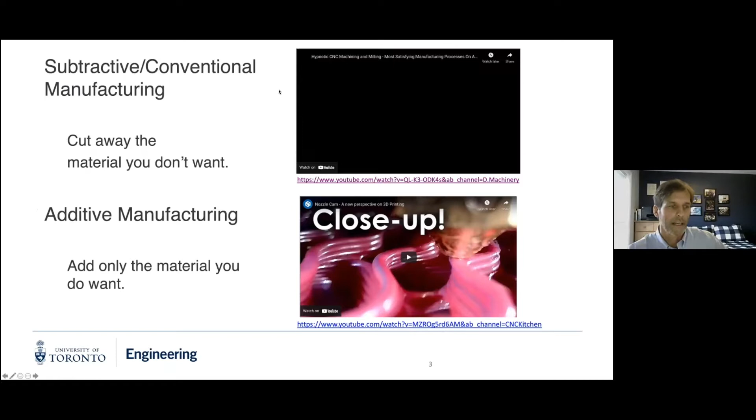I'll start in a very basic way talking about the difference between conventional, or subtractive, manufacturing and additive manufacturing, which is the other word for 3D printing. I'm just going to flip back and forth to a couple of videos here, so bear with me for a moment.

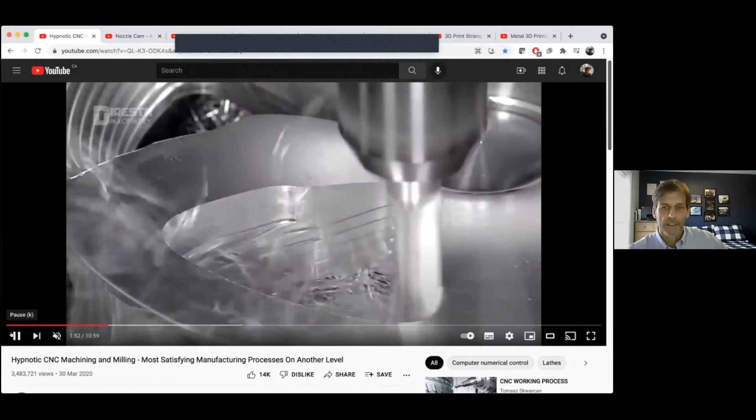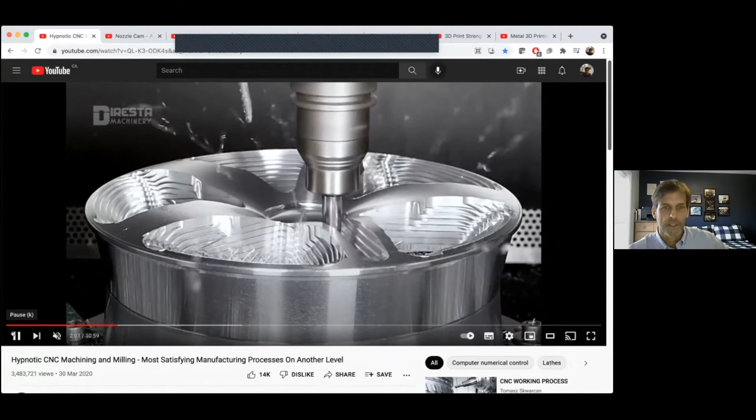Here is conventional subtractive manufacturing. We start with a big block of material and cut away the bits we don't want. It takes some time, but that's how metals are typically produced still today on CNC milling machines—computer-controlled milling machines. Additive manufacturing is a little different.

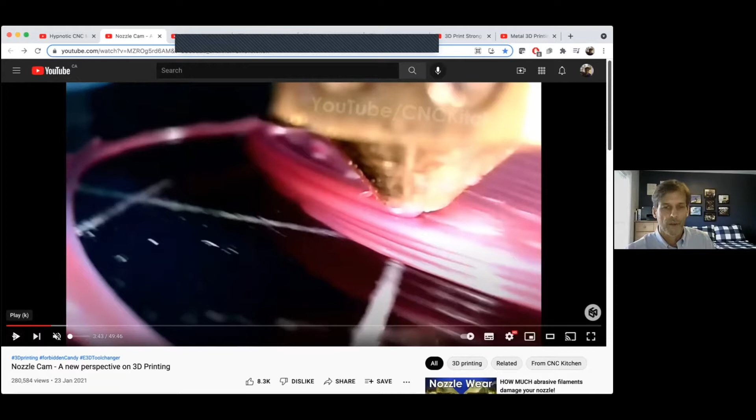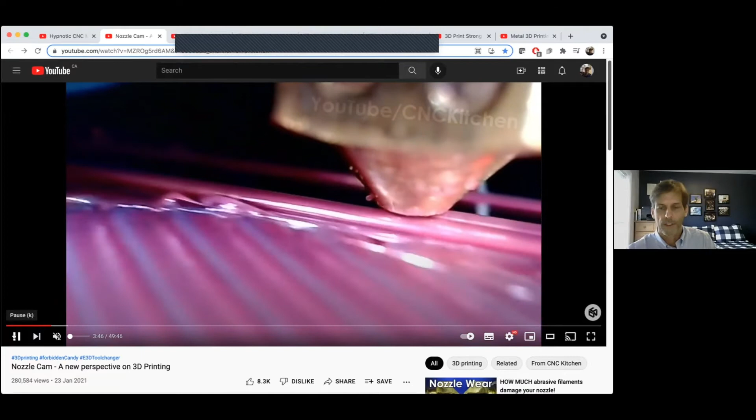Rather than taking away material, we're going to put it specifically where we want it. This is a slowed-down video of the nozzle of a 3D printer. Effectively it's like a glue gun with an XY stage. The stage moves around underneath the nozzle, and the nozzle spews out a little plastic filament, a little bead—it's very thin. These layers might be 50 or 100 microns thick.

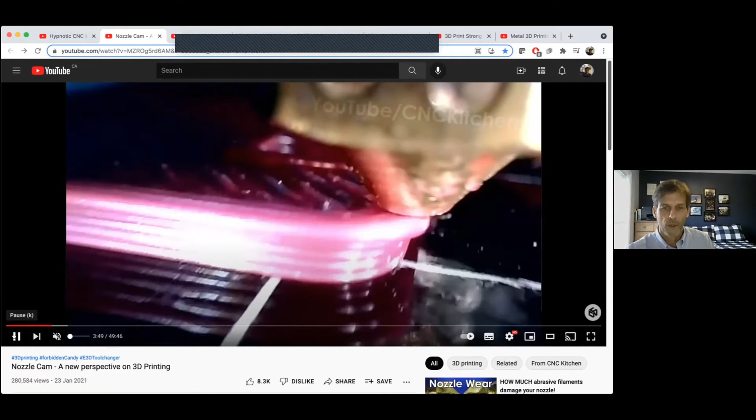We put it down only where we need it, as a melt, and it solidifies over time. We build the structure up layer by layer. So that's effectively how this works.

So let's go back to my presentation.

Let's focus in on fused filament fabrication, sometimes called fused deposition modeling—but that's a trademark term, so the generic term is fused filament fabrication. This is the method of 3D printing I've just shown you: a line by line, layer by layer deposition, putting material through a nozzle only where we want it.

We have a thermoplastic, a meltable plastic that comes in a filament on a spool. It gets fed through the nozzle of a miniature glue gun, effectively. The stage moves around and we build up the part.

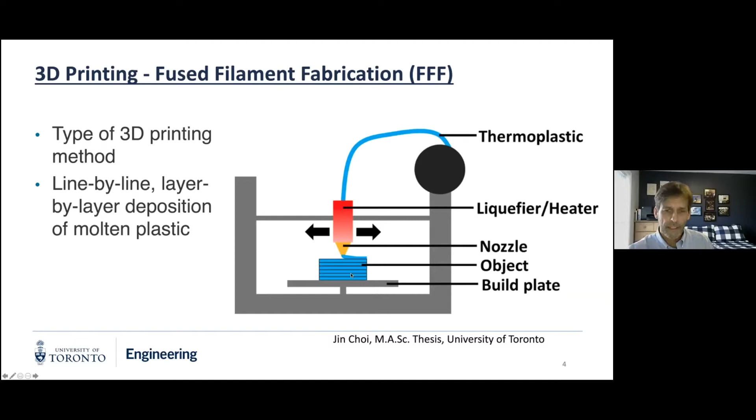As I said, I wanted to take a moment and actually make that real for you and show you exactly how this works in practice. I think we have time to build a small part, so we're going to walk through all the steps and get the printer beside me going. The first thing we do is design the part as a digital file.

I'm going to use a program called Autodesk Fusion, which is actually freely available to hobbyists, and it's a very powerful program, not too hard to learn—though it's a few days of learning, not a few hours, to get going. I'm by no means an expert. There are simpler programs too, like Tinkercad, a web program that's even easier to use.

It's the standard way of transforming between a CAD program and a 3D printer. The next step is to slice that file to send it to another program, which also is freely available. That program takes the physical part described by the STL file and converts it into a set of instructions, exactly where the filament is going to be laid down, in what sequence, and so on.

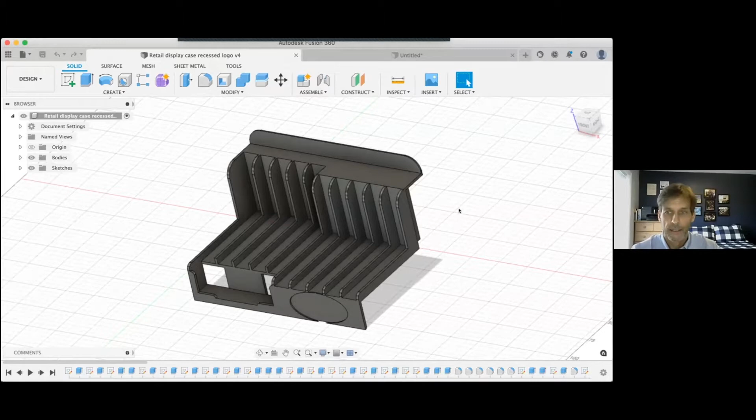Let's start with Autodesk Fusion. That's the program I'm going to use to build a part. Here's a part that's pre-built, a three-dimensional part, and I'll show you that this has been printed on my home printer, and it corresponds effectively exactly to the digital file we created. But I promised we would start from scratch, so let's do that.

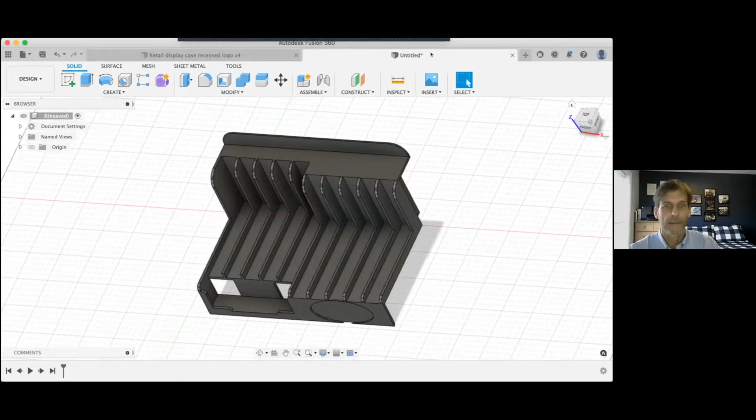Here's a blank canvas, and I'm going to create a very simple part. You don't need to follow all the steps, but hopefully you can see how this works. I'm going to make it very simple, a box. I'll put it on this plane, place the first corner, and place the second corner.

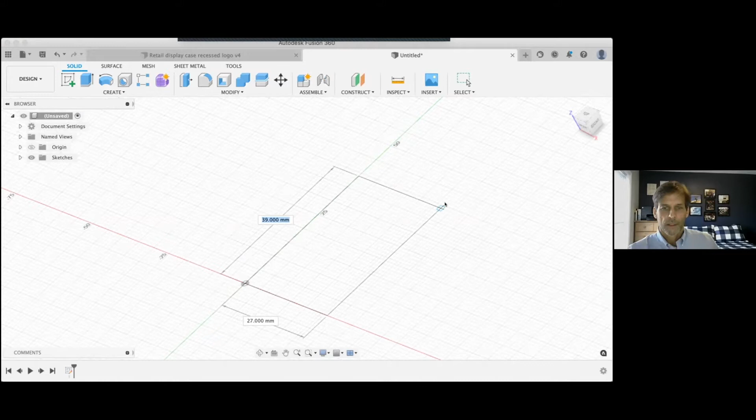Let's make it 40 by 30, something like that, and it's 1 millimeter high. I'd like it a bit thicker than that, so let's say 10 millimeters high. Okay, so now I have a solid part that's been created.

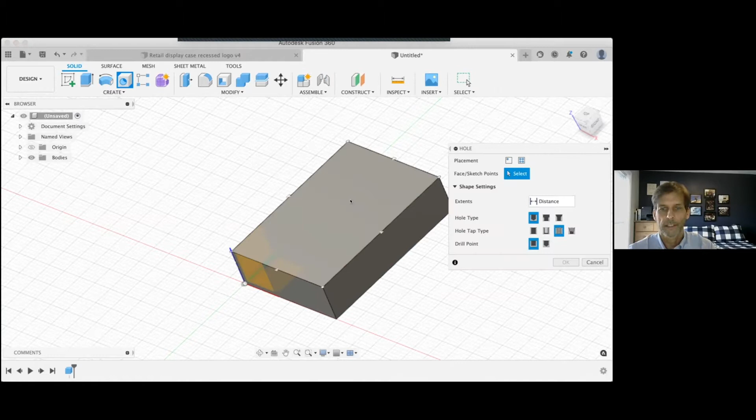I could send this to the printer, but let's make it a little bit more interesting. I'll put a hole in it, and I want to make the hole here, for example.

I'm going to create a custom threaded fastener. Here's some details on the right-hand side you can see. It's a simple hole, a tapped hole, and we could countersink it. We could do a number of things. Yeah, okay, I'm happy with this.

Now I have a 3D part. I can rotate it, it's ready to go. It didn't take me too long. It's a simple part, but obviously the more complicated it is, the longer it will take.

So what I'm going to do, I'm ready to print. I'm going to send this to the 3D printer by choosing 3D print from the drop-down menu. And I need to select which part it is that I'm going to print. So this is the one I want to print.

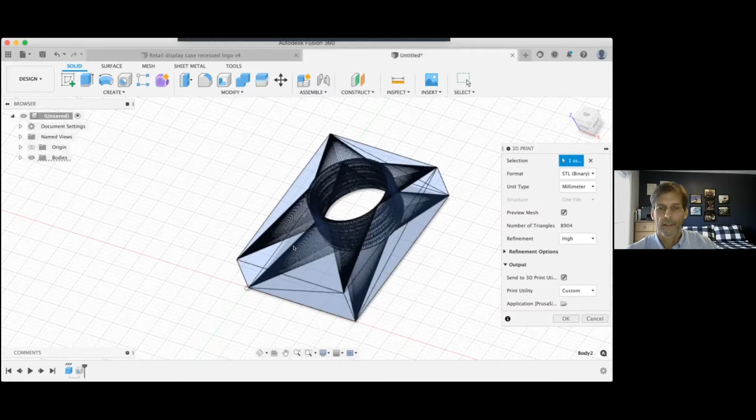What happens is that the surface of the part has now been represented as a series of connected triangles. So the STL file is actually a description not of the solid, but of the surface. But the surface is closed, so it incorporates the solid part.

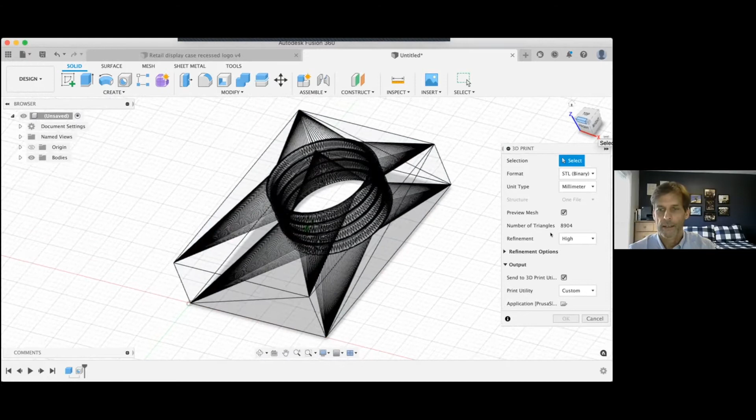Again, this is the part I'm interested in. I'm going to accept this part, and yeah, so now an STL file will be created.

The next part of this process, I need to share a different screen because it's been sent over to the slicing program. Hopefully I'm not going too fast. This would be much better as an in-person presentation. I'm just trying to give you the sense of basically how straightforward this can be.

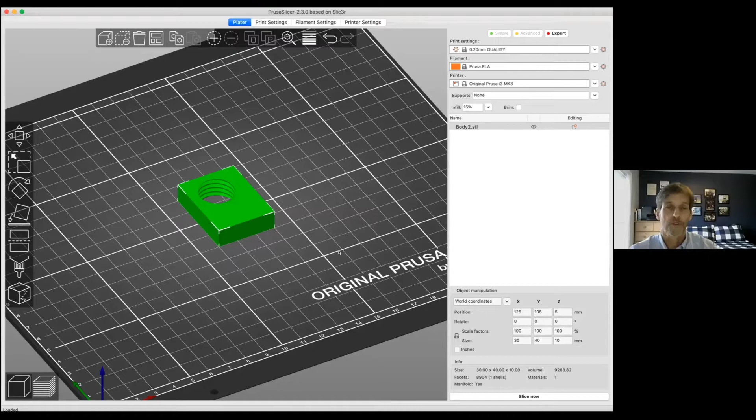Now I'm sharing what's called the slicing program. This is like a physical picture of the bed of my 3D printer, and here's the part on it. We can choose how we want to print it.

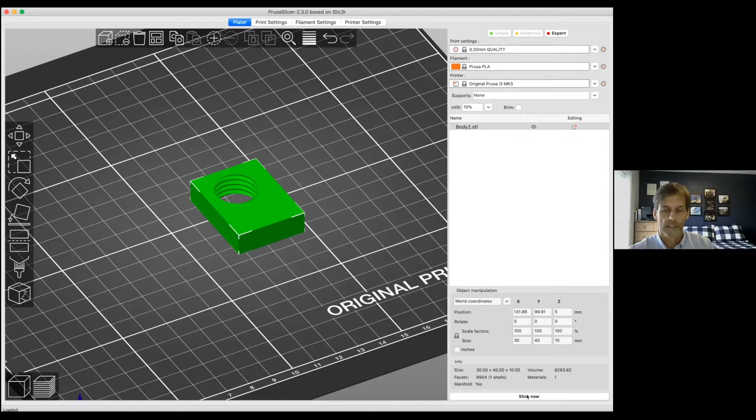There's lots of settings, but the default settings are fine. I'm going to choose 200 micron thick layers, that's up in the top here. I'm going to choose a 15% infill, so I don't want to waste too much filament. I'm not going to print it as a solid block of polymer; I'm going to let the center be hollow. I'm happy with all of this. I'm going to slice this, so convert it into instructions.

Now what we can see is the part, and these little beads represent filaments. Let me cut down through the part digitally so we can see exactly how this is going to be built. So I'll start at the bottom.

Here's the first layer, first couple of layers that are going to be put down. If we zoom in, these filaments are the ones laid down by the nozzle in a zigzag 45-degree pattern. If I step up one notch, that's the next layer—the printer head moves up and lays down the second layer. Again, it's like a glue gun, just miniaturized.

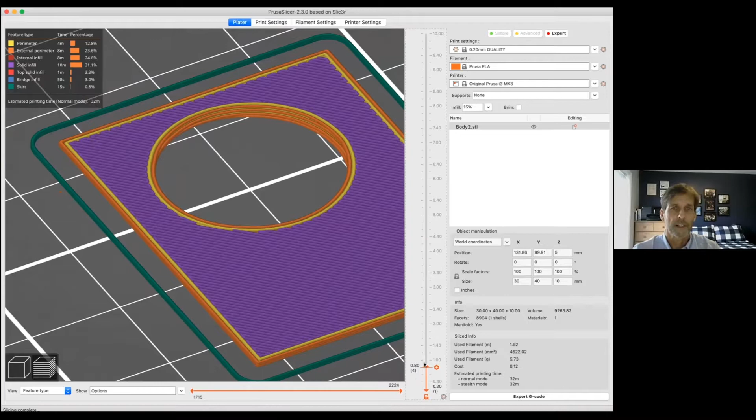Now we're into the area where I'm going to have the infill. I said I didn't want to waste filaments, so I'm making this a sparsely filled solid. The fill pattern can be chosen, but this is the fast default one. It builds up as I walk through this part, which is only 10 millimeters high, for scale.

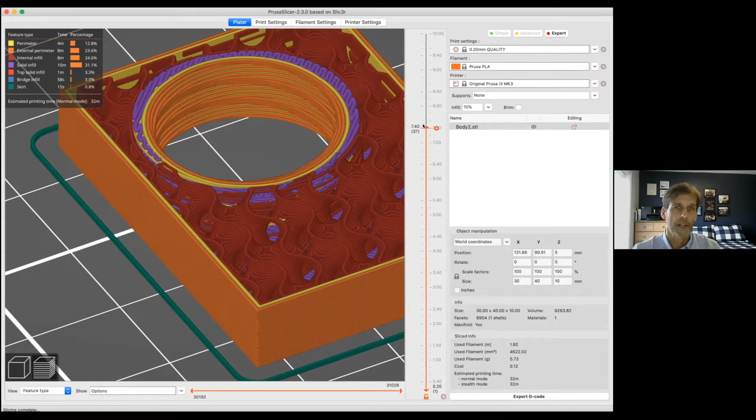The threads are being printed, everything is being printed. If I'm not happy with this part, I can change settings—I can make it coarser. Sorry for the motion sickness here. There's a whole variety of settings that can be changed, but I know by default this part is going to print okay.

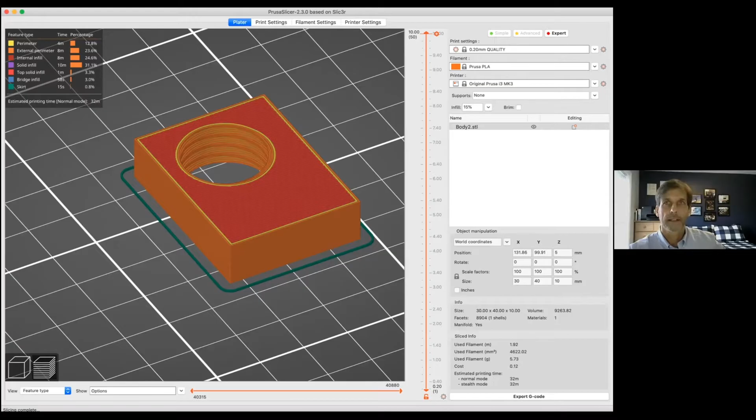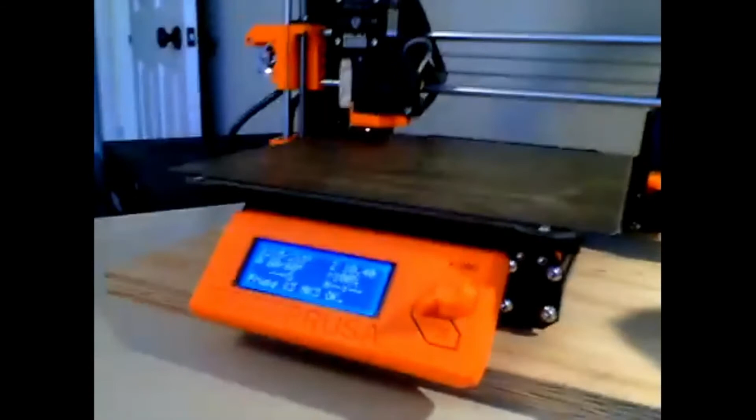So the next step is to export the G-code. I'm going to stop this share and switch to a different camera. Hopefully you're looking at my printer now—here's the printer sitting on the side of my desk, a Prusa Mark III, made in the Czech Republic.

I've already preheated it, it's ready to go, and I'm going to print from the SD card. This is a part I just designed—actually, I cheated a little and preloaded a part identical to one I designed yesterday, just as fast to send across. The bed is already hot, so let's take a moment and watch what happens to the printer. It's all ready to go.

The first thing that happens is the printer levels the bed. The layers are very thin, maybe as low as 50 microns thick. In this case I've chosen 200 micron thick layers, about 4 times the diameter of human hair, so we want to make sure we know exactly where the base plane is.

Now the filament is being fed down into the nozzle. We're throwing some filament down to clear the nozzle, and now we're printing. I know from the screen this will take 32 minutes, and from the software it'll consume about 2 meters of filament, and it's already printing.

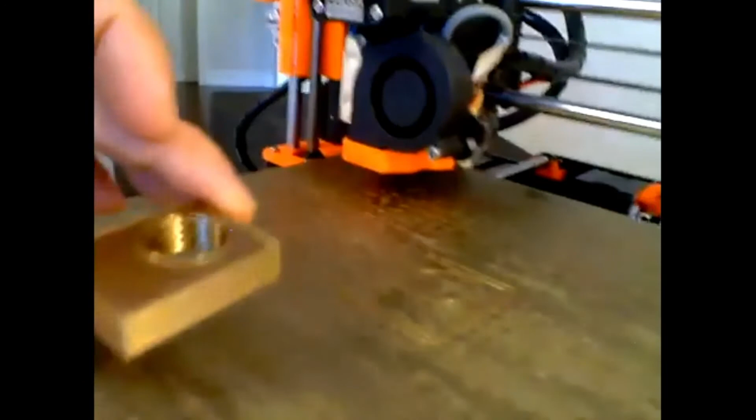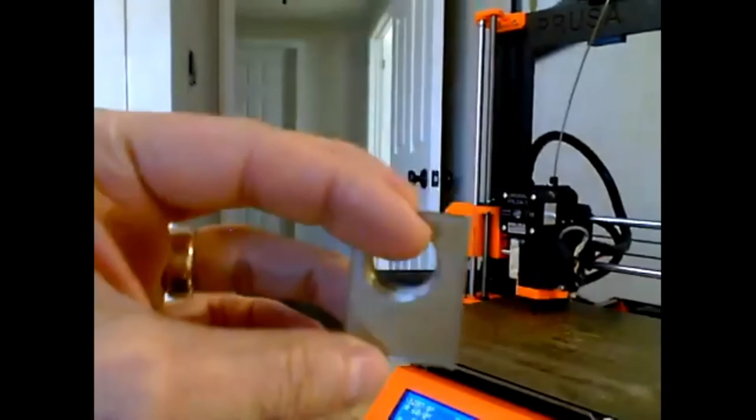I don't want to have this running while we're talking, because of the noise, so I'm going to cheat a little and do like the cooking shows. There's the first bit of filament laid down, but I basically designed the same part earlier, so if we came back 32 minutes from now, that's the part we'd be looking at. We'd snap it off, ready to go—it's light because it's hollow, but it has the threads and everything. It would be a perfectly dimensioned part, very comparable to what I designed in 3D.

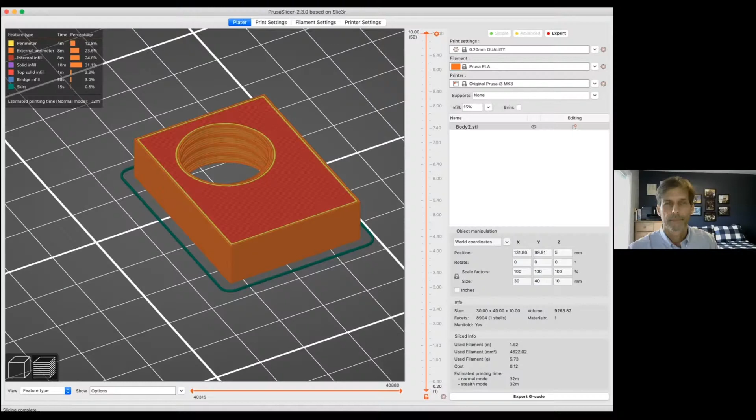All right, so there are some alternatives to this that I just thought I'd discuss, as we're still talking about the workflow and what it takes to actually get printing. We'll spend another 5 minutes on that, then move into some of the printing technologies.

There are some alternative workflows. Instead of designing the part yourself, you could just pull a CAD design from the web. For those of you that have done any machine design, you'll be familiar with the company McMaster Carr.

McMaster Carr is a company that used to have a 6,000 page paper catalog, but now it's all online, of course. It's a place where you can order mechanical components, gears and sprockets, hydraulics, all kinds of components.

They upload the CAD for all of those components, the computer-aided design files, so you could build a machine with those and incorporate those gears. But there's nothing to stop you from just taking that CAD, bringing it into Fusion, and printing that gear if you wanted to make a prototype of your machine. So that's one thing you can do.

A second thing you can do: there are lots of hobbyists on the web, and repositories of designs that people post for fun. So if you wanted to print a chessboard, no problem - you can go download thousands of different designs for chess pieces and just download them to the printer and print very easily. This part I'm showing you, I actually printed.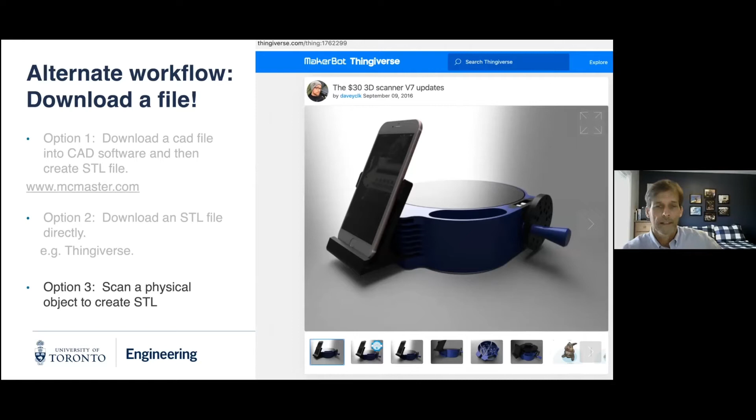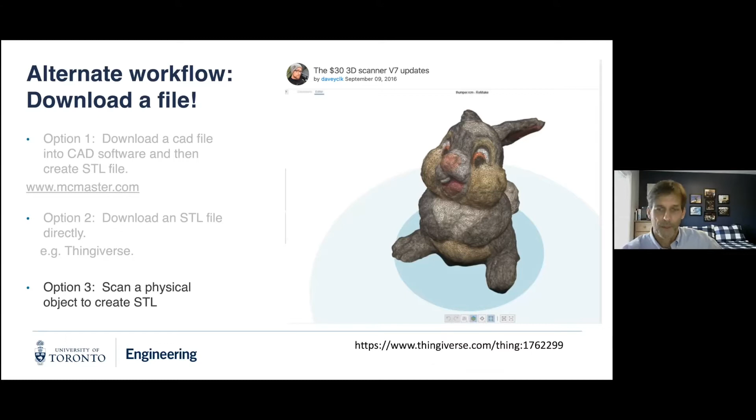So you put an object on the turntable, you turn it. I haven't actually done this myself, I confess. The output of that scanning process is an actual surface, a 3D model, which you could then send and print and physically replicate in plastic, this thing that you've scanned. So you can design, or you can find files and print them. Those are the main things.

Cindy asked for some recommendations about low-end printers. I'm not going to make any specific recommendations, of course. I use one from the Czech Republic - the machine I use, it's a Prusa Mark III. It's a fantastic machine; frankly, it's never let me down.

But here's just one I pulled up from Amazon. They can be very cheap. I do recommend spending a little bit of money because things like bed leveling, knowing exactly where the bed is and so on, could be less hassle if you spend a little bit more. But I have no comment on this particular printer - it has good ratings on Amazon.

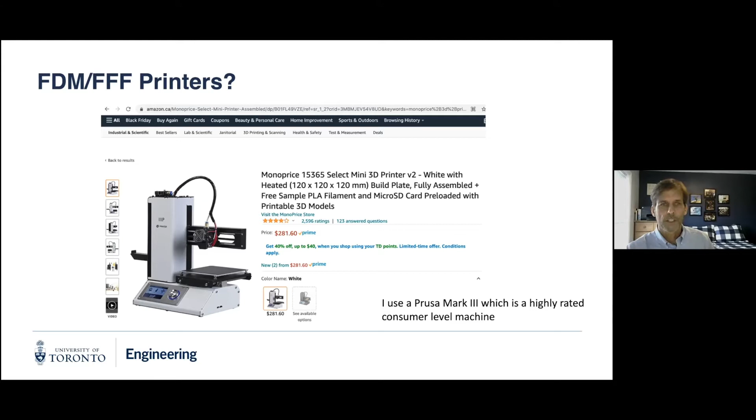It's obviously very inexpensive. These are all fused filament printers - this very simple print technology we're talking about is the most common kind of home printing technology. If you don't have a printer and don't want to buy one, in Toronto at least, the libraries have them. All of our undergraduate students can print in our brand new Myhal fabrication lab, our light fabrication facility, so they're in very good shape, undergrads and grads within the university.

John asked for reasonable cost places to print. I don't know what the costs are - you probably pay per meter of filament, and you can do it in libraries. There's lots of little clubs and so on as well. It's not too hard to find. They're called maker spaces - if you're looking for the code word to find this community, they're called makers, and places are often called maker spaces.

And if you have a more demanding application, maybe you want to print in metal or print production parts or some other technology, there are professional service bureaus that just have printers and run them all day long, and that's their business model. I have used this one in Vaughan, Ontario before - it's Proto 3000, just one of many professional service bureaus.

So that's a first part of the talk, just a description of how to move from a CAD, an idea, to CAD through to a printed part.

I want to move on now and talk a little bit about printing technologies and give you some fundamentals of printing technologies so that you could invent your own printer if you know the basics. There have been printers designed around all of these fundamentals, and there's probably not a lot of space left for brand new printers, but I'm sure there are things you could do to generate a new technology.

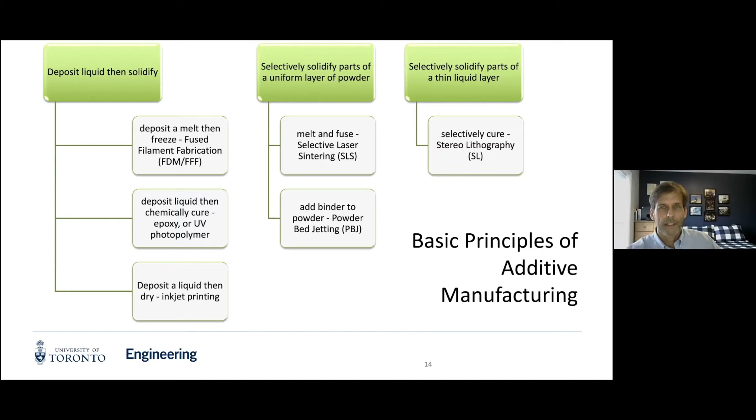So those are some of the technologies. One ancillary thing we need to think about is the idea of support. I'm printing a bed here, and for some reason I'm also printing these boxes beside it—the reason becomes obvious at the end, because I want to print something that's overhanging. If I let the filament squeeze out of the nozzle and just print it into free space, it's not going to stay there, of course.

I can print at an angle, maybe 45 degrees, perhaps even more, so I can print an overhang that's 45 degrees. But if I have a 90-degree overhang, that's not going to work in my printer. So what we do is print a series of supports, and then we have to remove those supports after the fact—either taking them out with a pair of pliers, or dissolving them, or using some other technique—and we're left with the solid part.

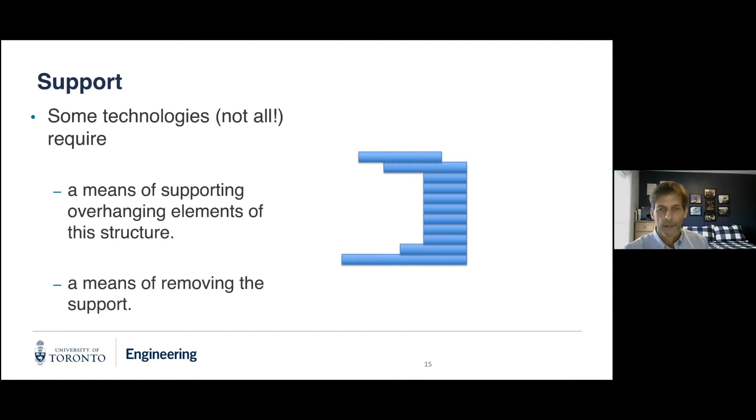Let me share an interesting mega application of this deposition, this filament deposition process. I'm going to go back to Chrome and share this with you. We'll go to the next one—this is 3D printing of houses.

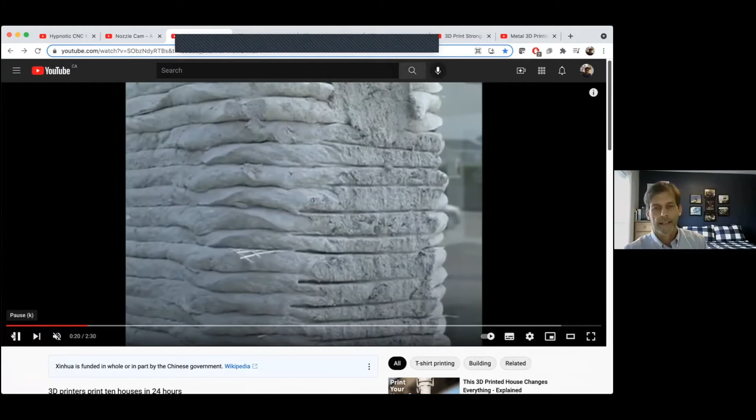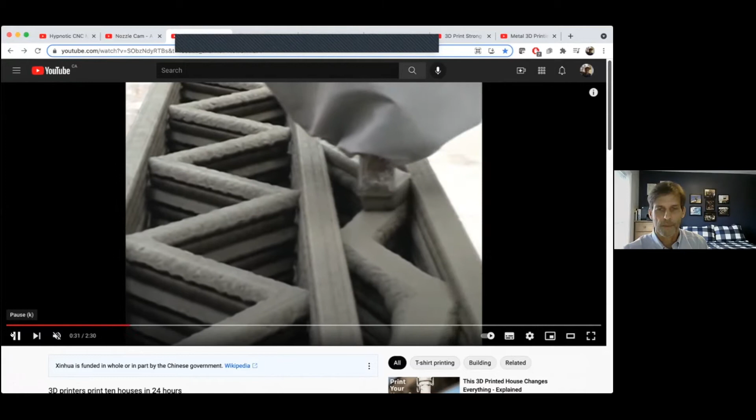Concrete cures with time and it's fairly viscous, fairly solid. This is a giant version of my 3D printer laying down a bead of concrete, like a truss system, and the concrete is thick enough to sit there until it chemically cures. Concrete cures over time, as opposed to drying.

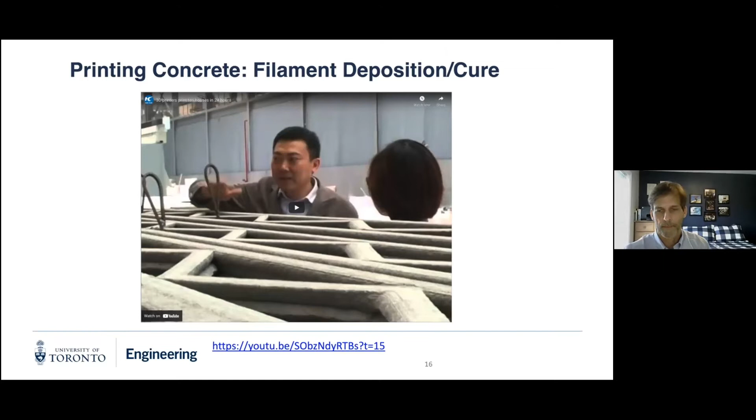So let's talk about some other technologies. We could have a jetted UV process, where we put polymer down and then hit it with a UV light immediately, either through multiple nozzles or a single nozzle. This is called a polyjet—multiple nozzles lay down a sort of thick resin which is UV curable, and right away I hit it with a UV light to solidify it in place.

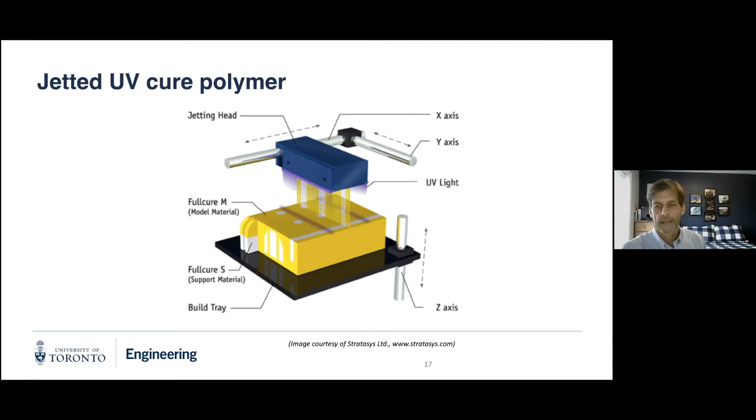But other than that, it's similar to the printing I've already shown you. The next one is a little bit different. This is selective laser sintering.

The workflow starts the same, CAD, CAM, and so on. But instead of putting a solid down through a nozzle, in this case, if we look at the right-hand side, we're building the solid part. We have a bed of powder, and we hit it with a laser beam to solidify it where we want.

Then I drop the bed one unit, push another powder film over top, sprinkle a little powder on top, hit that with a laser beam, and so on. This is called selective laser sintering. It's another major class of 3D printing.

The advantage of it is that we don't need support because the solid is sitting in a bed of loose powder. At the very end, I reach in, pull the piece out, and shake the loose powder from it. That powder could be polymer, but it could also be metal if the laser is sufficiently high powered.

So we could create a laser fused metal part in this way, and that would be a much stronger part. A number of you asked about part strength, and I'm going to talk about that in the last part of the talk.

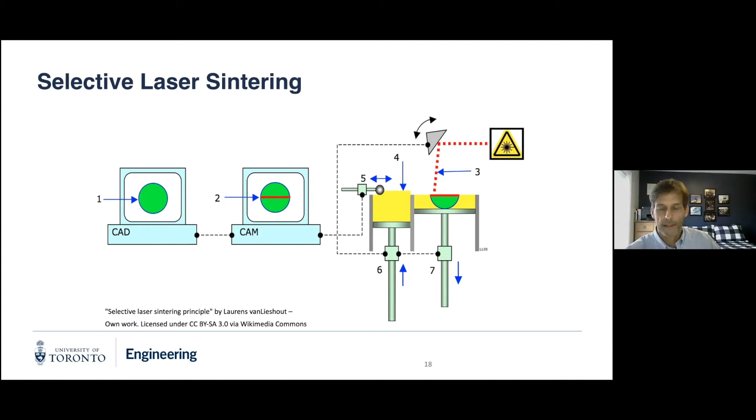One of the other original 3D printing technologies, from 1984 I think, the original patent, is called stereolithography. That's where the STL file gets its name.

In this case, I have a vat of liquid resin and a support platform that's descending into that vat. I put a layer of liquid resin over top of the part, and I hit it with a laser beam or UV beam to cure it where I want it. Can be a projector as well. I make the solid only where I want it by curing the liquid polymer.

Each time I create a layer, it's always layered, so it's very similar to before. The liquid resin drops away and I'm left only with the solid part. That is called stereolithography.

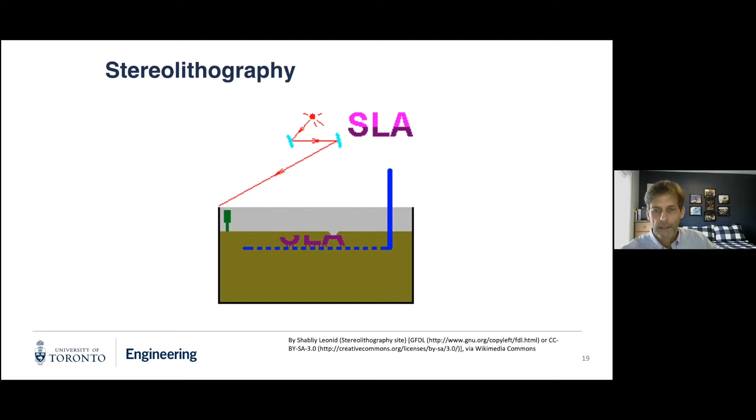The other main kind of printer you might see at home is something I would call inverted stereolithography. The problem with stereolithography is that if you hit it with a laser beam, you can have some partly cured molecules left in the bath, so you might not be able to reuse the polymer bath again.

So what's happened is that it's been flipped upside down, and now we have a platform that descends into the bath. If you look at the right-hand side here, here's a platform, and this is the first layer that was printed, the layer right next to the platform, up in the top right.

The platform descends into the bath to within 50 or 100 microns of the bottom. The tray is transparent, and the laser beam comes up from underneath to cure it and stick it to the platform. Then the platform lifts, and I cure the next layer, so I can get away with much less resin in the bath.

I'm just going to flip back to the videos I've got here, to show you a schematic of how this works. This is a Form 2, quite a good quasi-consumer, almost prosumer level printer, I would say personally.

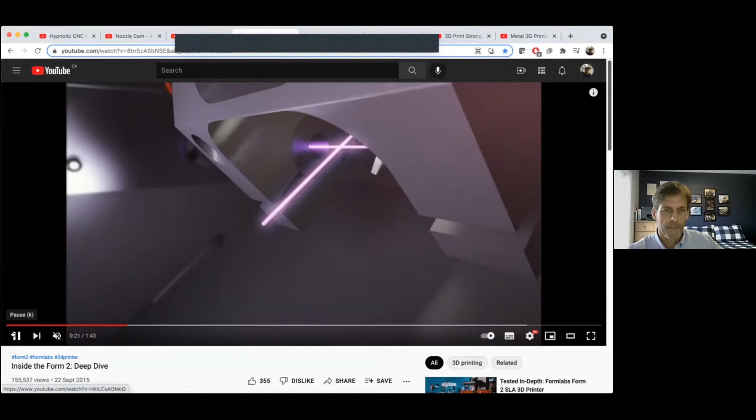There's the platform descending into the bath, and here's some of the mechanics. They use a laser beam which they bounce around through the tray from underneath. They cure the part layer by layer and pull it up out of the bath.

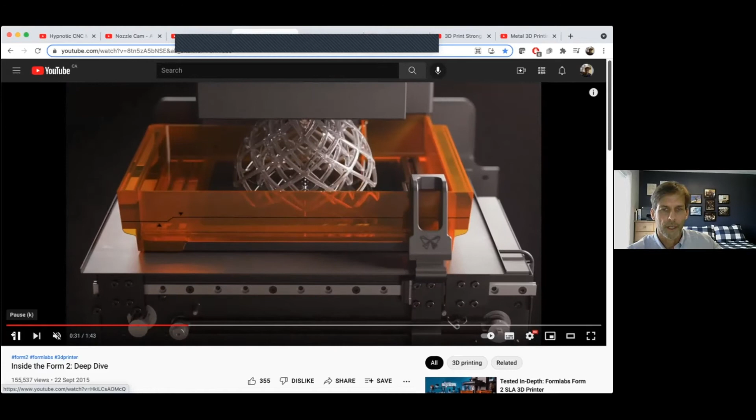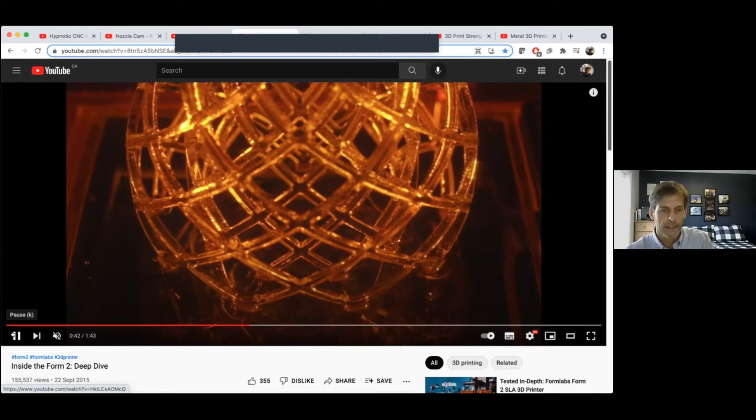Now they use this sideways swiping motion to dislodge the part from the bath. Then they drop it down to within 100 or 50 microns, cure the next layer, lift again, and again you're building layer by layer. This is a relatively slow process.

A very clever modification of this process happened in the last five years or so, by a company called Carbon 3D. Let me explain how this works. This is the same inverted stereolithography - the platform descends into the bath of resin, and in this case I think it's a digital light projector, so they print the whole image at once as opposed to a single laser beam.

But they've done something incredibly clever, which is that the bottom of this tray is porous to oxygen.

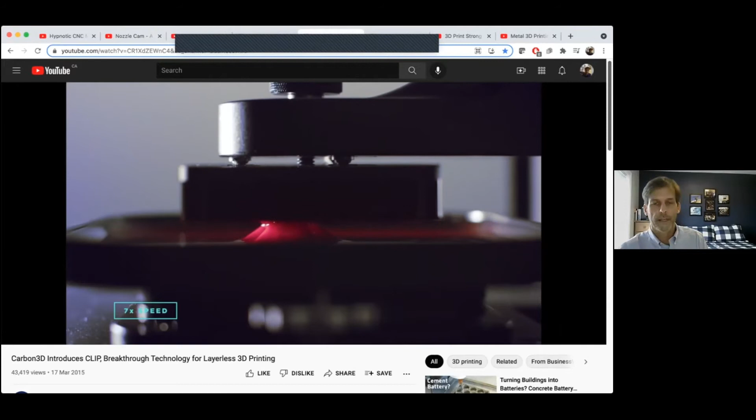So they're curing the layer that's right next to the tray. I'm going to run the video here, at 14 times the speed - I actually doubled this up. They're curing the layer right next to the tray, but also feeding oxygen through the tray. That inhibits the cure and prevents the material from curing right at the tray surface, so the solid is never actually connected to the tray, never sticks to it.

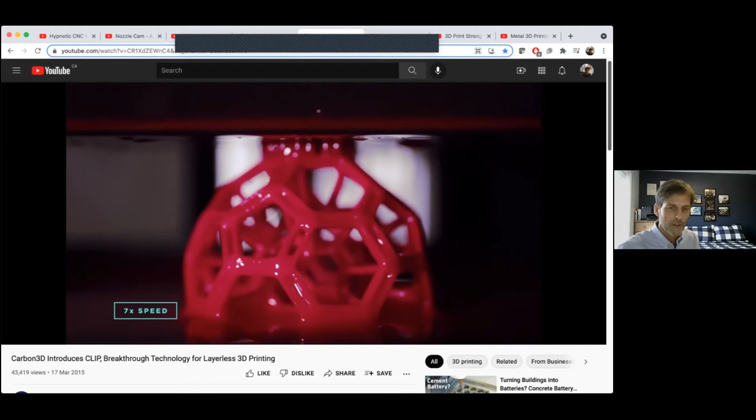And they can essentially pull this part continuously - that was at 14 times the speed. They can pull that part continuously out of the bath because it's never stuck to the surface. It's really a fascinating technology.

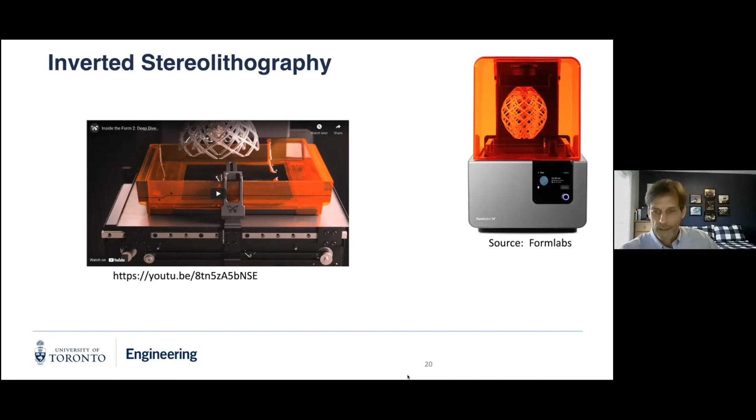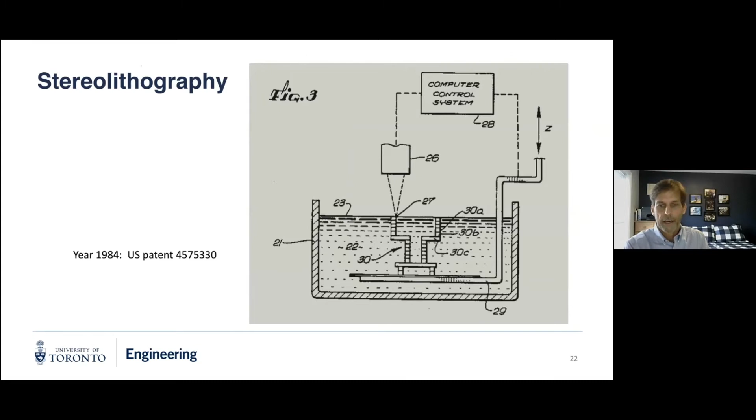I did want to say a little bit about the history now, and I'll talk about material science next, but let me say a few words about history first. The main technologies, stereolithography and fused filament fabrication, were invented in the 80s, and patents last for 20 years. So in the 90s and the aughts, those patents expired. That is when we saw an explosion of 3D printing. It was pretty much used by industrial designers in the interim, but then suddenly all of these 3D printing technologies became home use.

So all of these 3D printers - Kickstarter is a place where inventions go to get their start, and I can tell you hundreds and hundreds of 3D printers began around 2010. It was a real explosion of interest as the original foundational patents expired.

Maybe I should go back now and talk a little bit about the motivation for additive manufacturing. There's a few motivations. Firstly, of course, it's quick. We can go directly from a digital file - we don't have to make a mold, we don't have to do any slow and expensive CNC machining. We go right from a digital file to a prototype.

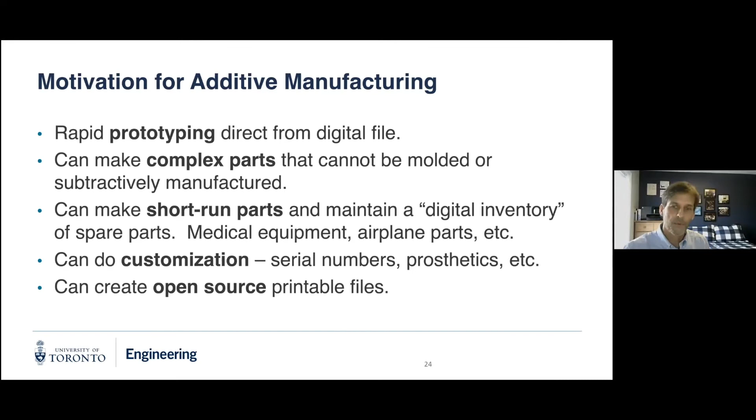So I showed you earlier a prototype of a design, but that design went through several evolutions - it got a little better, and then a little better. Each time those parts could be printed and tested to see if they were good fit for purpose - not as production parts, but just for inspecting the design. So we do this rapid prototyping. It can be functional too - you can print gears and so on.

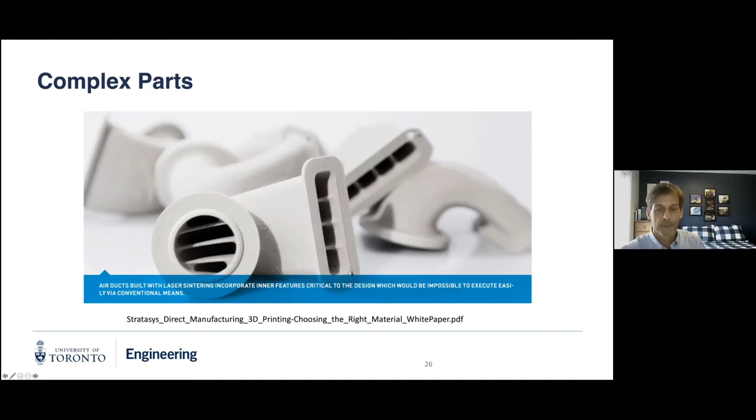But this is only, so far anyway, for short run parts, not for parts where we want hundreds of thousands. 3D printing is still relatively slow compared to the process of injection molding, and I'll touch on that in a moment.

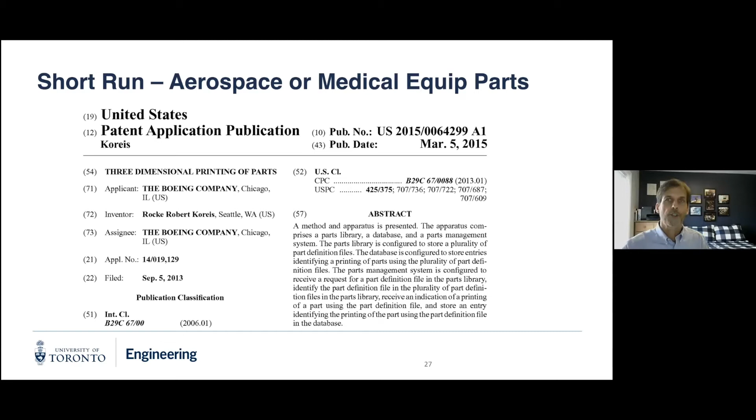And the last use case is custom parts. So this company, Unlimited Tomorrow, is now sending you a scanner. You scan your limbs at home, you send them the digital files, and within a reasonable period of time, for a very modest cost, you get, in the world of prosthetics certainly, a kind of bionic arm that matches your opposing arm perfectly because you've scanned your opposing arm - all done remotely, all done by 3D printing. Fascinating.

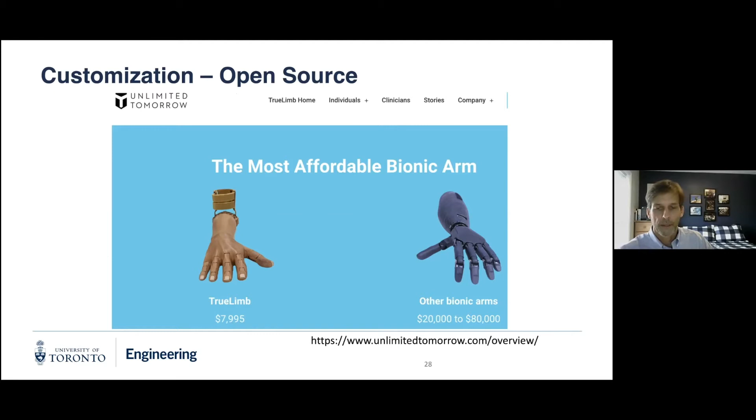Okay, last part of my talk now - I want to talk a little bit about material science, about the strength of these parts and some of the limitations. So when we're building a non-functional prototype - here's a prototype I'm holding up, this little part rack, and I built multiple types - I don't really worry about the mechanical properties. But if I want this to carry load, I am a little concerned. This part has been printed in two different filaments - I just changed the filament color from gold to black, not just stop the print and change.

So that's nothing special about that. But one thing is this part is printed in layers, and it's actually quite brittle, I'm going to destroy it on camera here. It's not too bad in this direction, but in between the layers, they're not bonded as well as they are in the plane.

And the reason for that is that we're relying on polymer diffusion. We're putting a molten bead of polymer onto polymer that's already solidified. These polymers are made up of very long chains, that's why they're so viscous. Those chains do not like to diffuse into one another readily. So some polymers work much better than others for 3D printing.

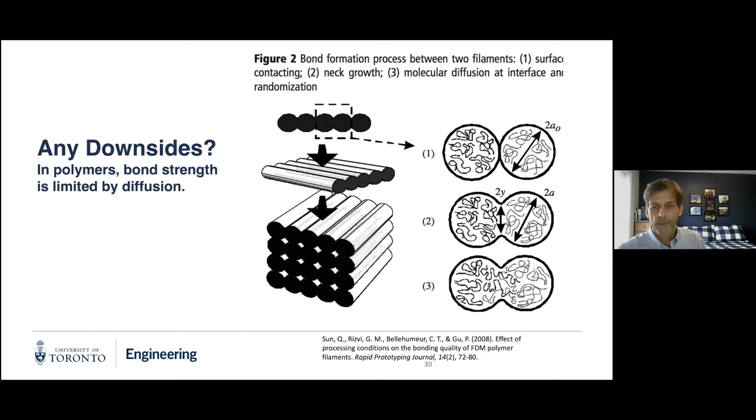But there's always going to be this issue where the strength between layers is... typically in a fused filament fabrication, the strength between layers will be a little lower. We might leave a little bit of porosity in the part. So there are some kind of limitations.

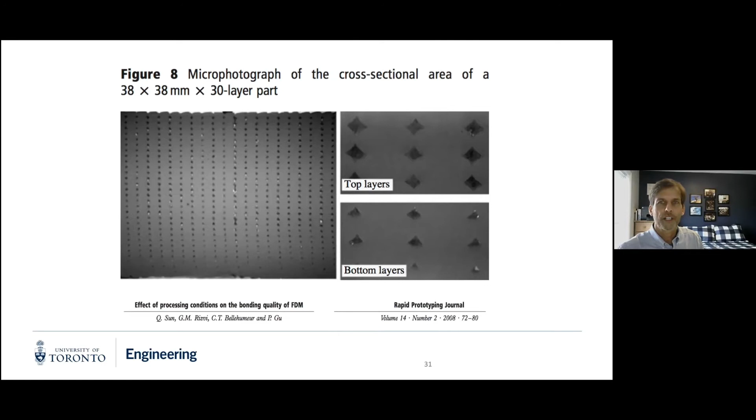Now let's contrast that to injection molding. So I'm going to quickly share an injection molding video. Let's have a look at this. So this is a typical injection molding.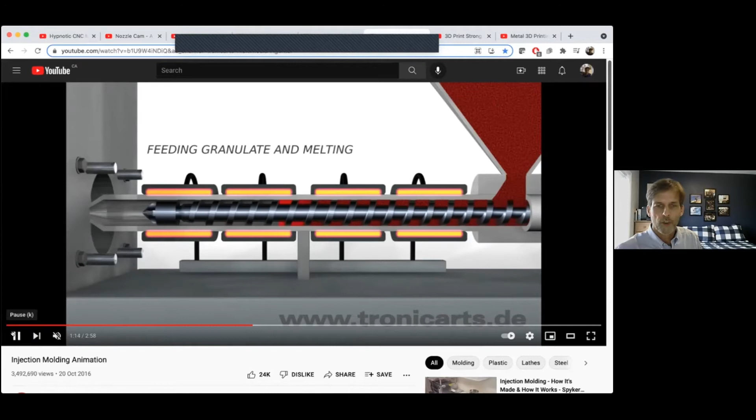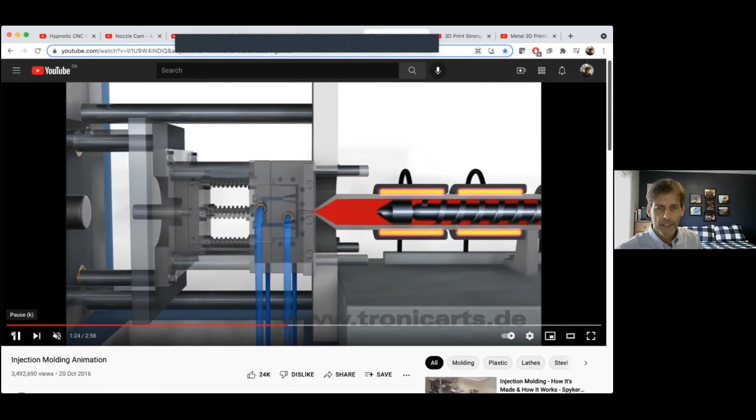If you're not familiar, solid polymer granules are fed into a barrel. They're heated up and melted. They are then squeezed into a mold. So here's a closed steel mold. Here's the interior of it, shown in cross section. I'm going to squeeze the polymer in, and there we go. And then we let the mold cool, and finally the part drops out.

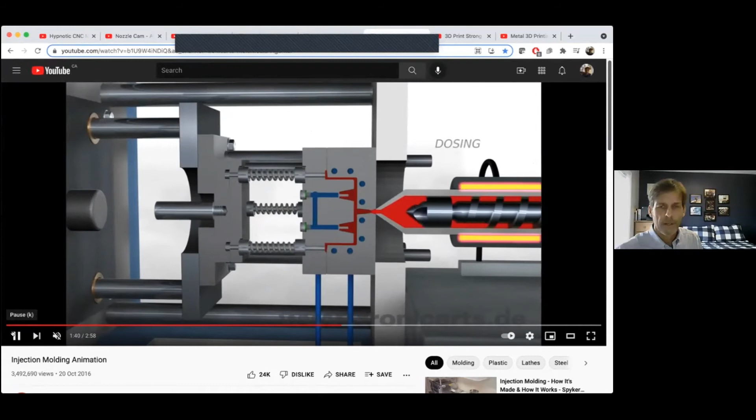So that's a solid part, and there isn't this interdiffusion problem because it was all molten, all solidified at the same time.

Sharing again, I'll just hold up the finished part now. This is a part which has been injection molded after all that work. The CAD was 3D printed, we checked it, but ultimately we used the CAD to make a steel mold like the one I just showed you and squeeze an injection molded part.

And this part is made in, I don't know the exact cycle time, but it's maybe 30 seconds or a minute at the most. And it costs very little money, and it can be made in large numbers, and it's relatively strong because of the way that it's been manufactured in injection molding.

So to answer one question about the mass distribution, are we going to switch all to digital 3D printing as we've switched largely to digital paper printing? My answer is maybe for some, maybe for metals, as we'll see, but for polymers, and large runs of parts, injection molding is still a much less expensive and much quicker way to make good parts.

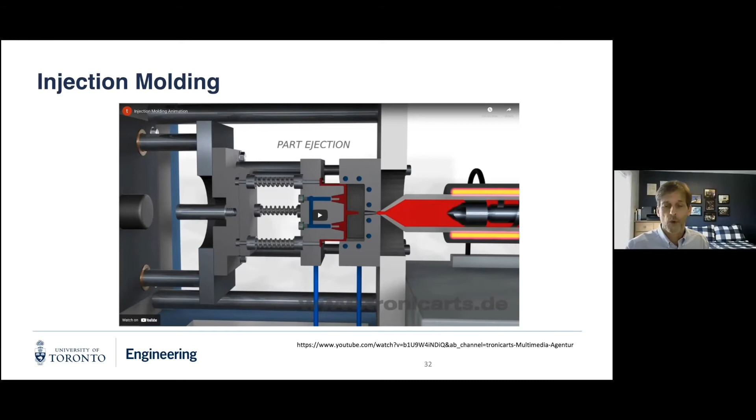So can we do better with our 3D parts? I've got about 5 minutes left, so I just want to touch on some higher performance 3D parts. Gary asked about anisotropy and high strength filaments in the questions before we started.

And yeah, it is possible to print fiber reinforced plastics. So in my printer, I can use a fiber, like a glass or carbon fiber reinforced filament, and just print it as normal. When I do that, what happens is the fibers tend to line up. There's extensional flow in the nozzle of this printer.

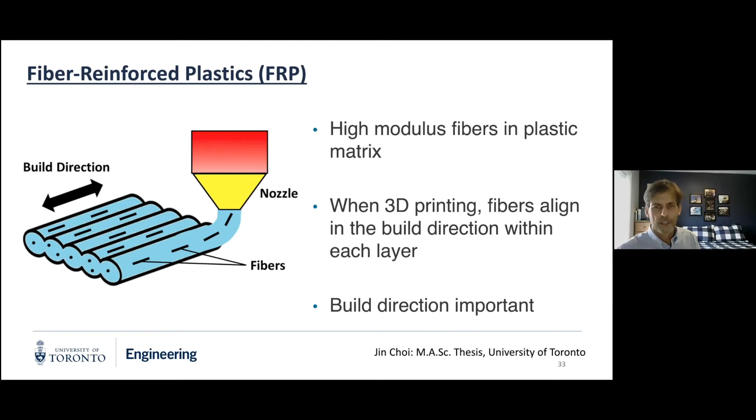At the very beginning, when we saw the filament laying down, even unreinforced filaments are, because of the filament direction, a little stronger in the filament direction, and the printer naturally laid down subsequent layers at right angles to each other. But it's especially important if we were to use fiber reinforced filaments. We make thin layers, and we would lay one layer down at 0 and the next one at 45 and minus 45 and 90. That's how we would get a material, a sheet, which was strong in all directions.

This is normal for composite manufacturing, even conventional manufacturing. We've done, this is some of my material science research, so we've investigated the effect of how you lay these, how you build this layered structure up on the strength, and particularly the modulus. When all the fibers are pointing in one direction, it's stiffer in that direction, but it tends to be brittle and can snap in the transverse direction. So for sure, in a sheet, you may want to lay down some layers at angles.

In composite mechanics, we have very good theory to predict exactly how these things are going to behave. But interestingly, right now, I'm not aware of any commercial software that will allow you to control the build based on the need for mechanical properties.

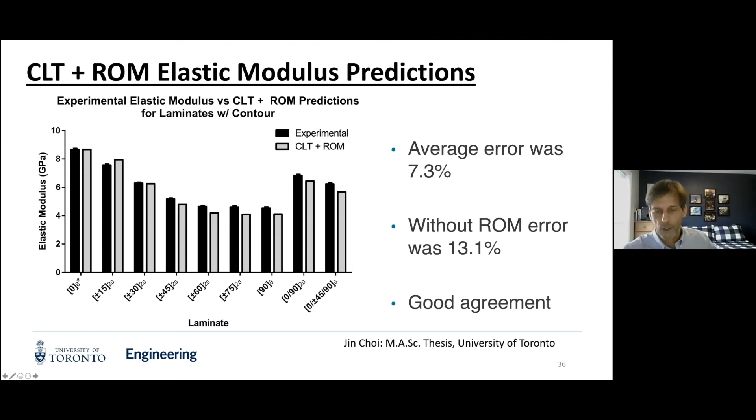Even stronger, I'm not going to show this video, but Markforged is a company that is actually reinforcing polymers with continuous fibers. They're taking continuous carbon fiber off a spool, mixing it through the nozzle with a polymer, and that's making an extremely strong material, comparable to aluminum.

So there were some questions about very high strength parts. Yes, I can build tensile parts. I can build very high strength composite parts using a technology like that. And the printer is very similar, but more sophisticated than the home printer I have here in the office.

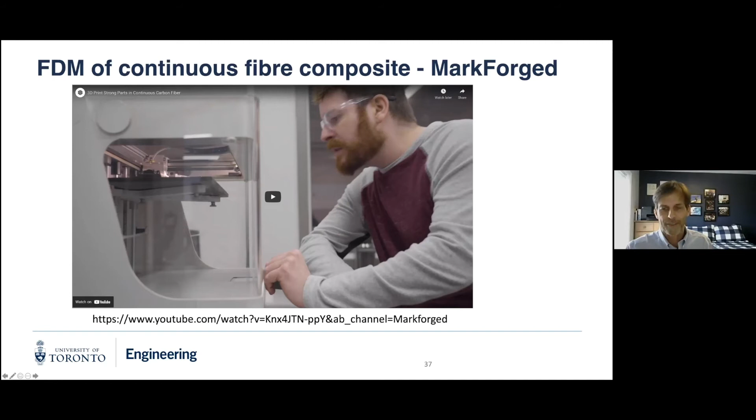Just another little bit of research that I've done. I was interested in seeing whether in the inverted stereolithography we could add fibers to that. So I had a master's student work on this, and we'll see. What we found, we were trying to print a long specimen, and we want the fibers lined up in the vertical direction, in the long direction. So we bring the build plate down when the specimen is partly built.

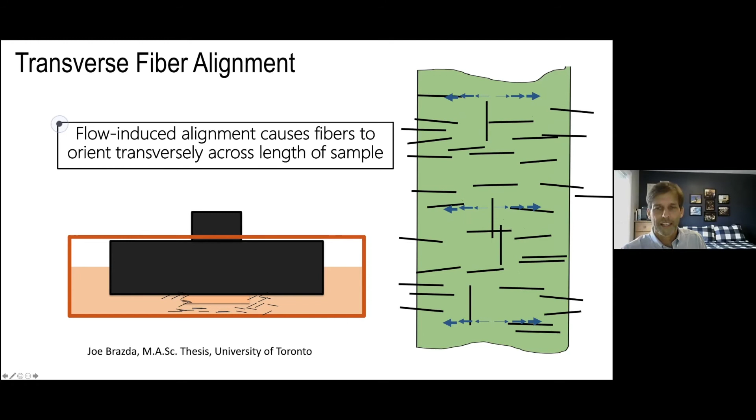And what do we see? The material gets squeezed out sideways, and actually the fibers line up in the wrong direction. It's the opposite of what we wanted. That was one of the findings in this little bit of work we did on inverted stereolithography reinforced with fibers.

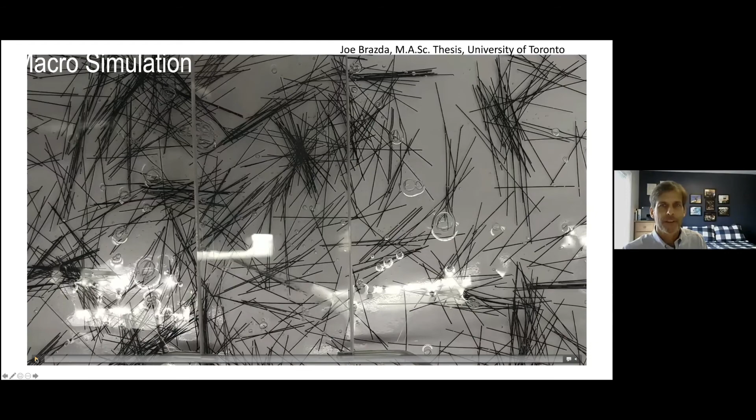Here's some nylon bristles in a bath of soap, and I'm looking down from the top. I'm squeezing the build platform down, and you can see those fibers getting pushed in the transverse direction, which frankly is not what we want for high strength materials.

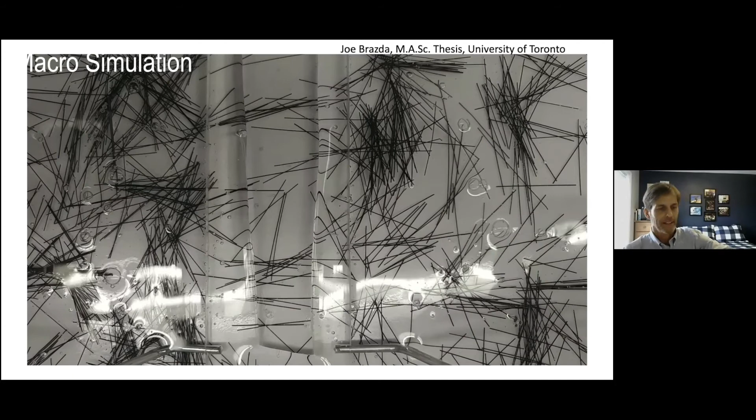I've only got a couple minutes left, I'm almost done. So I did want to say something about printing with metals. We've talked mostly about printing with polymers, since I have a polymer and composites background. But printing with metals is also possible.

I already talked about selective laser sintering in a metal powder bed, so you can just hit a powder bed with a laser and create a solid part layer by layer. But there are some less expensive and newer technologies more recently—a couple of ways of printing that powder and just binding it. We could have a powder bed with some polymer coating on the metal particles, and we could hit those with a lower power laser beam, low temperature, and glue the metal together.

Or we could filament print with a metal powder filled filament, and in that way make a part that is metal particles bound together with polymer. Then we remove the binder and sinter the part into a solid metal part. Sintering is just like heating it up, but not melting it, so it keeps its shape, it shrinks, and we have to account for that sintering shrinkage.

But of course, that's all done automatically in software, and it is possible to pretty rapidly build a metal part this way. It takes a little while to sinter it, but at the end you have a metal part which, because the metal doesn't have this problem with diffusion, is a pretty strong, highly dense metal part.

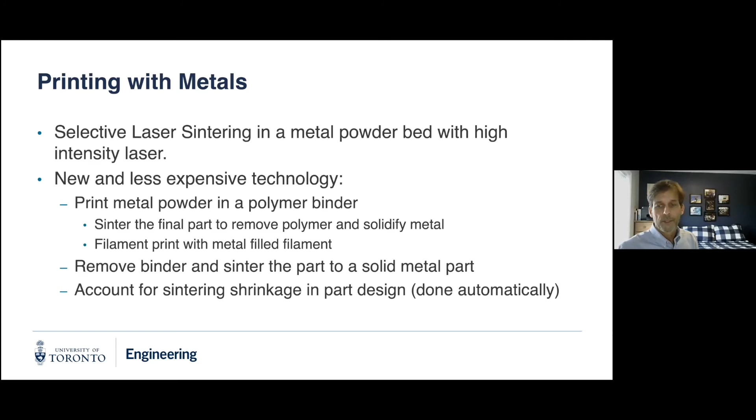So I'm going to flip to the conclusions. Summing up, there's a very low barrier to entry for simple industrial design type applications, trying out new designs, seeing what they look like in real life. You can build functional parts that do a job, with a wide range of materials. There are new applications coming all the time, and we're not going to replace all conventional manufacturing—injection molding is an example—but certainly I think increasingly 3D manufacturing will supplement conventional manufacturing.

Finally, I haven't discussed bioprinting. It's a very rapidly expanding area, but all the same basic principles apply. If we can deposit a solid selectively, and it's a biomaterial, fine—we can create tuned bioscaffolds that will be functional parts, and the material compatibility and so on will just depend on which materials we're printing from. With that, thank you very much for your attention.